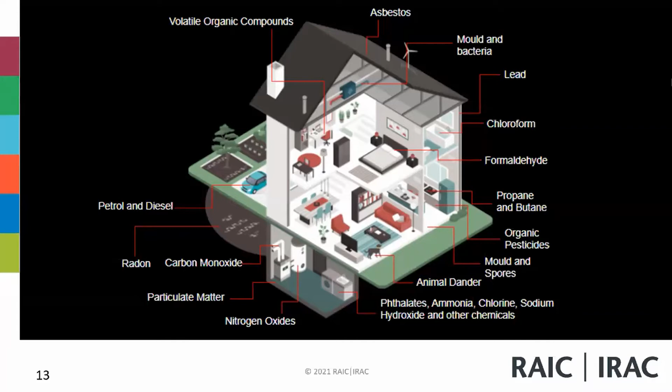Now, I've got 4 kids, so when I say this, I don't say it lightly. Often, the most toxic, most polluted room in the house is our children's bedrooms. We have all this stuff in there, and the air quality in those spaces is the worst. So this is something we really need to think of. This is beyond just the design side, but taking into consideration how we select what we bring into our homes.

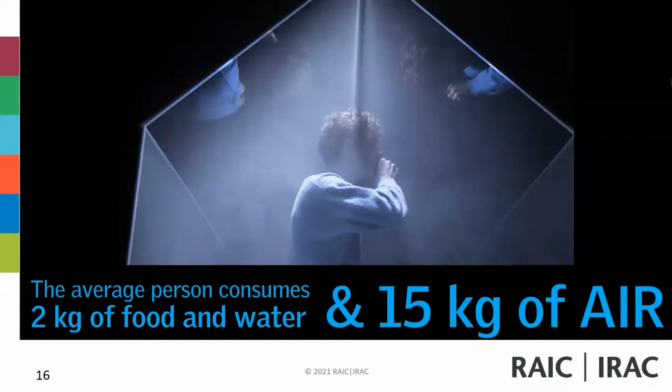The average person consumes about 2 kilograms of food and water. I drink a lot of water and I'm close to 100 kilos, so I'm probably a little higher than that. But for comparison, we breathe about 15 kilograms of air. That's a lot of air. We breathe in 11 or 12,000 times a day. So this is a lot of air we're bringing into our bodies, and our bodies are picking up on any of that pollution that's in the air. The air quality inside can be bad, and we're breathing a lot of air.

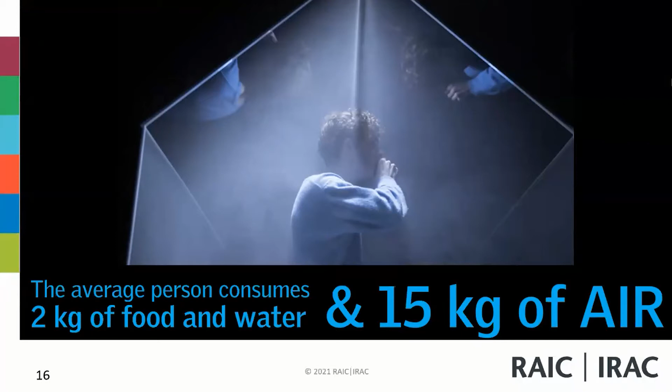And guess what? We're spending 90% of our time inside buildings. This is a big deal. In the last year, most of us, or many of us working from home, have probably spent more than 90% of the time inside. So that potentially polluted air is what we're breathing most of the time, and it can have some impacts on us.

So how does this affect people? The short-term effects of poor indoor air quality include dizziness, fatigue, confusion, headaches, nausea, irritation of eyes, nose, and throat. I focus on short-term because to me, wellness is short-term. Wellness is how do I feel today, or in the near future, where health is how am I going to feel years from now.

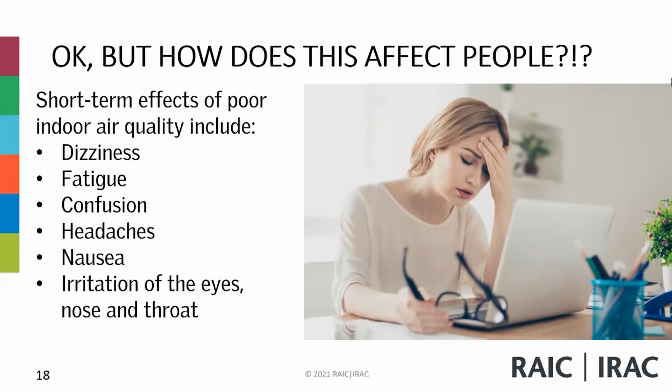And on the health side, indoor air quality can affect asthma, allergies, and other ailments. But really for wellness, this is what we're focusing on: how is it going to affect us now? It can also impact our focus, our problem-solving ability, our productivity. It can make you less strategic, less creative, and more risk averse if you have bad indoor air quality.

And this is a big deal. Think about the boardrooms where companies are deciding the future of their companies and whether they should take big risks or not. Next time they make a big decision, they should consider what's the air quality in here. Are we being too conservative?

Classrooms—there are a lot of studies that show indoor air quality has a big influence on how well kids learn. I have 4 kids, so this is an important thing for me. When you're designing schools, indoor air quality has to be an important element of what you're doing.

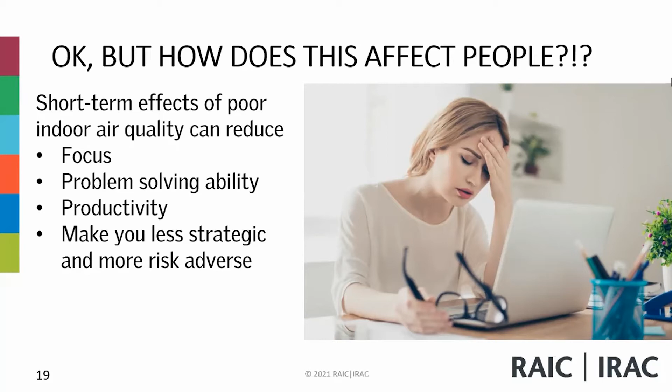So should we be airing out these spaces? No, that's not a picture of me, but I am the one in the meeting typically that does the long blink, or nods my head, or drops my pencil.

I traveled around for about a year with a portable CO2 meter, and I took it to the hotel rooms with me. I took it to all my meetings in architect offices around the country. I started to correlate how much influence CO2 in particular, but air quality overall, has on me. I run the risk of being that guy that fell asleep in the meeting, so this becomes important to me because that's embarrassing.

And if we're in a situation where we can say, hey, let's open up a window or let's open the doors and air the room out a little bit, that's beneficial for me. So we now have, in my own office and in my boardroom, CO2 meters installed.

I also put CO2 meters in all the bedrooms, office, and ground floor of my house, so I can keep an eye on this because it does have an impact. I'll say after measuring it in hotel rooms where sometimes the ventilation isn't so good, it impacts my sleep. Maybe I fall asleep faster, but I definitely don't get as good a night's sleep when the air quality is poor.

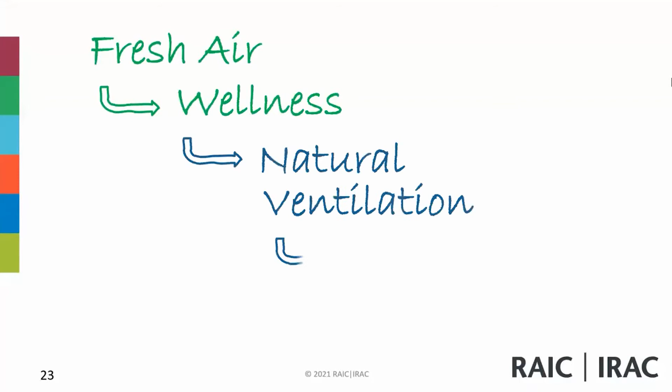So when we started off, I used this as a bit of an agenda and an overview of the presentation. I've now covered off fresh air and wellness, and I'm now ready to move into natural ventilation. So let's go forward - I jumped ahead of myself a little bit.

So, 3 steps to good indoor quality. First, minimize indoor emissions - this is all the materials. Some years ago when we were all learning about LEED, we were learning about low VOC paints and the glues that were used. I remember lots of people saying it's not the smell of new, it's the smell of glue, and that's an indication of the VOCs. So looking at the materials we're putting into projects is a great way to reduce emissions. Second, keeping it dry - making sure you're venting your cooking and your showers and making sure your basement's dry. If it's residential, of course; in commercial there are other sources of moisture you have to think of.

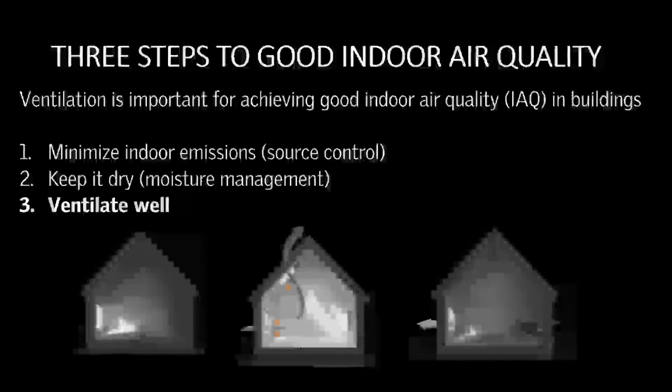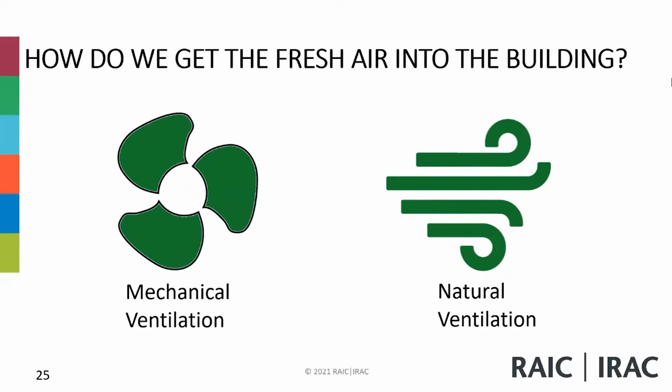But the next topic is you have to ventilate well, because if you've got bad indoor air, the best way to deal with that is to bring in fresh outdoor air. And how do we get fresh air into the building? Well, there are 2 main types of ventilation: mechanical ventilation and natural ventilation. Mechanical ventilation uses fans to pull outdoor fresh air into buildings, and it can distribute it through ducts, or just locally at the fan. It can actually be exhausting air from the building while fresh air is coming in from somewhere else, but really it's using mechanical means - fans - to move that air.

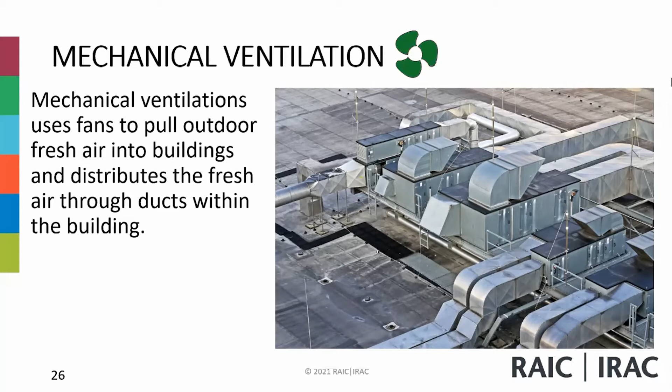Now this has some pluses, because you can increase the size of a fan and add filtration to clean the air as it's coming in. You can add heat recovery ventilation, so you can precondition the air coming in - if it's wintertime and you're exhausting hot air, you could preheat the cold ventilation air coming in. So that's really beneficial, and it's predictable. This is why we gravitate towards it - a fan doesn't care about the outside temperature, it's still going to run at the same ventilation rate. So that's something important.

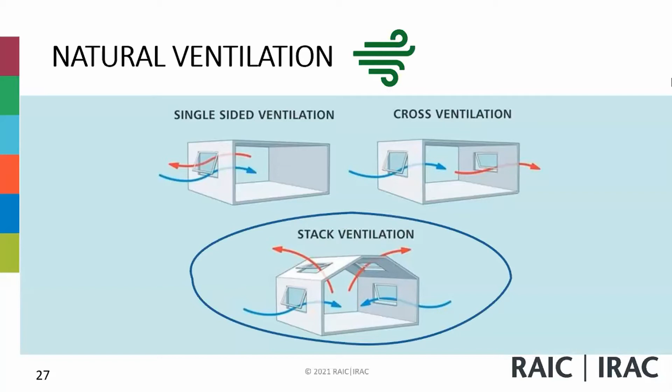Now, the one I want to talk a little bit more about is natural ventilation. You can just open a single window and create some natural ventilation, which is really the exchange of indoor and outdoor air. The one I want to spend the most time on is stack ventilation, and this is taking advantage of the buoyancy of air and the differences between the air inside and the air outside. I'll get into a little bit more of that in a moment.

So with natural ventilation, we have this stack effect. This is where skylights really do well, because you've got cold, cooler, dry air coming in and that warm, moist air exhausting out the top. And the height does make a difference - I'll come back to that in a moment. The other type of natural ventilation is wind, or cross ventilation, as we called it in the previous slide.

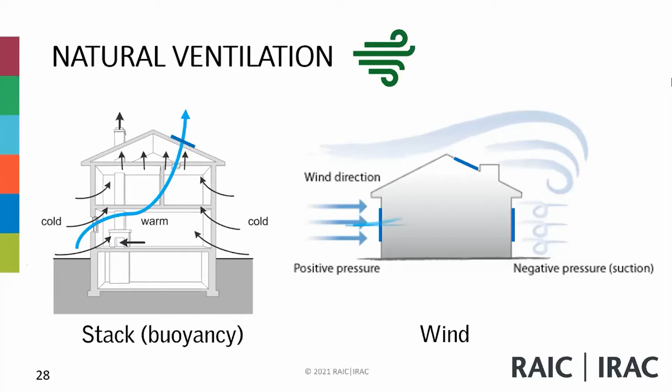This is creating a pressure by blowing against the building. The side being hit by the wind has a positive pressure, while the other side is negative, creating air movement in the same direction as the wind. This works on larger buildings—this looks like it could be an institutional building—so you get a similar effect of wind benefiting natural ventilation.

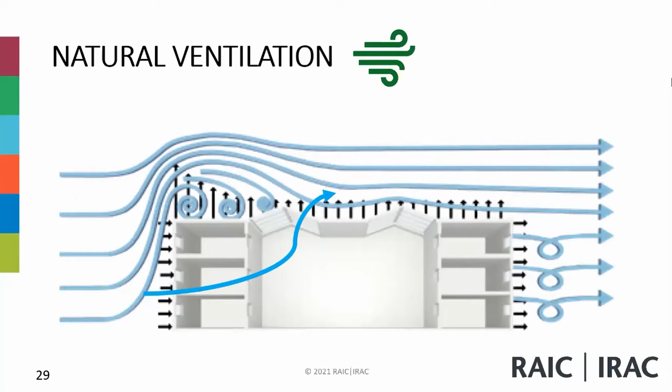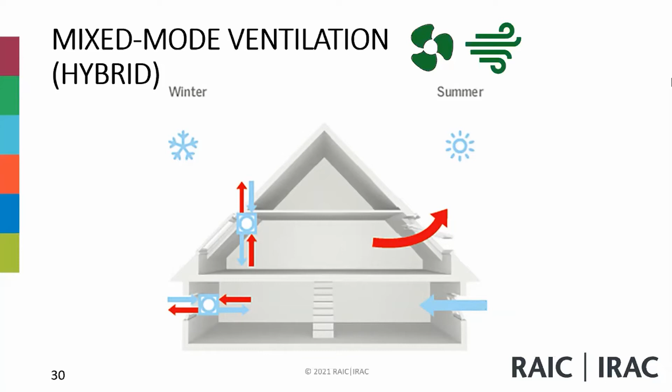Then there's the mixed mode, the hybrid ventilation. I think this is the model that becomes more interesting for North America, or at least for Canada, where we have hot, humid summers if you're in Ontario, dry conditions in other places, but also cold winters to consider, and you might not want to open your windows in the wintertime. So this model is worth exploring further, but we don't have time today, so we'll just focus on natural ventilation.

Now, to give you a deeper understanding about designing for ventilation, I've picked out three standards just to touch briefly on their approach so we can get a glimpse of understanding.

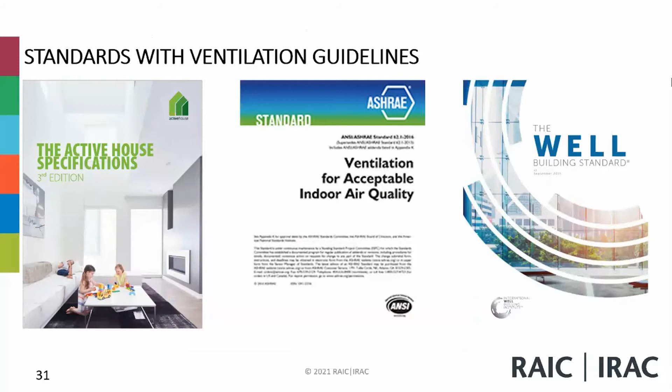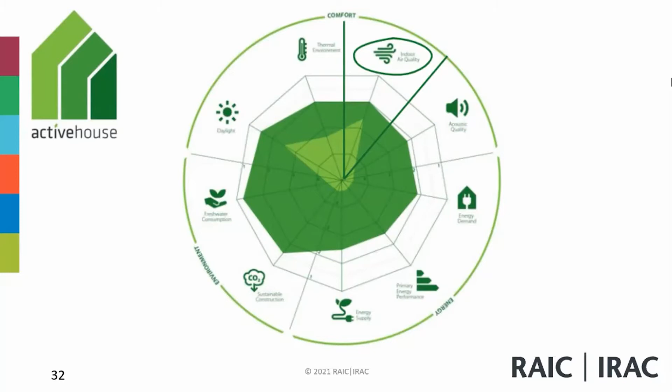So the first one is Active House. This is one I've been personally involved with. Active House came out of Europe, but it's gone around the world, and we have a couple of projects in Canada and a couple more in the pipeline. I like it particularly because of the comfort side. Of the 9 metrics, there are 4 in comfort in the latest version, and indoor air quality, circled at the top there, is one of the main design metrics you're working with in this standard.

Now, this standard's design targets are using CO2—carbon dioxide, the main pollution coming out of people—as the indicator for indoor air quality. That's debatable whether it's a good proxy, to use the industry language. But if you're in a space where most of the pollution is coming from people, then CO2 is a good proxy. Yes, it does ignore formaldehyde and other things, but if their concentration is low, that's not so important. So it's good to understand that caveat.

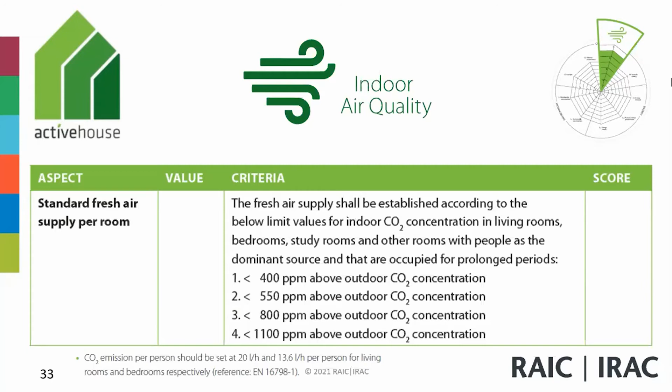They are using parts per million, which is a concentration level. To give you a reference point, typically outside is about 400 parts per million—that's what your outdoor fresh air sits at. This chart is giving you an amount above the outdoor level, so that 400 parts per million would actually show as 800 if the outdoor concentration was 400. And for one more reference, typically we say 1,000 to 1,200, depending on the article you're reading, is considered an upper threshold of good indoor air quality when measuring CO2.

So how do we model for that, or design with that? One option is a software from Velux that can model energy and indoor climate. You can build your model in there and figure out how much ventilation you need, and how much the open windows will provide for you.

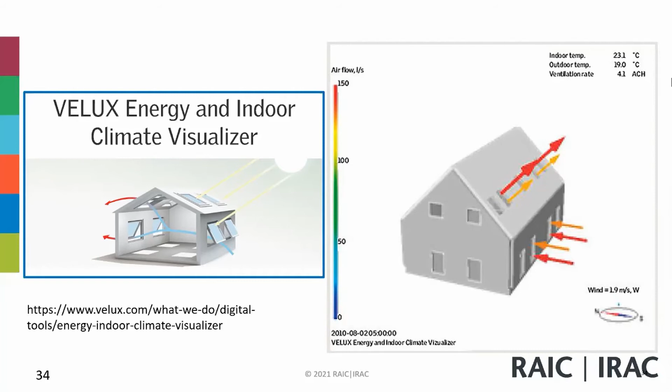Then we have ASHRAE, the American Society of Heating, Refrigeration, and Air Conditioning. This is what's called out in the building code—62.1 is the main one. 62.2 actually isn't called out in the national building code, but 62.1 is. I wanted to highlight this one line from the intent of the document: to specify minimum ventilation rates and other measures intended to provide indoor air quality that is acceptable to human occupants and that minimizes adverse health effects.

It's like a lot of things in the building code—it's the legal worst you can get away with. It doesn't say anything about optimizing comfort or well-being; it just wants to minimize adverse health effects. That's important because this becomes our benchmark of what is allowable by code, and that means there's an opportunity. This is your baseline, meaning there's an opportunity to have improved ventilation beyond that.

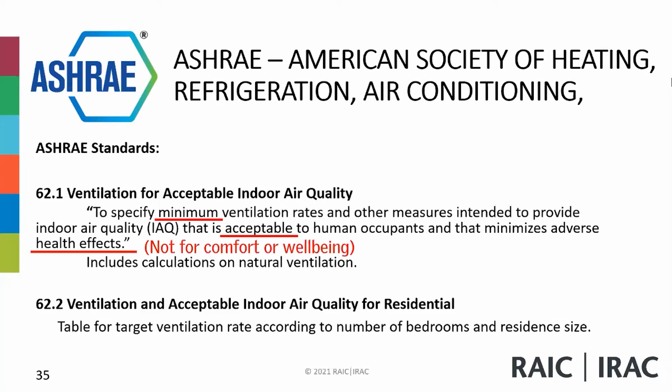Then there's the WELL standard, and I really like how they've approached it. They said, you know, ASHRAE is well known and respected, people are used to it, let's use that. But for larger buildings over 500 square feet, you need to use what's called demand-controlled ventilation, and in this case, they're using CO2.

Anytime the CO2 levels get higher, the more people or longer they're in a space, as they increase, once they hit that threshold of 800, you either have to turn the fan up to a higher speed or windows are going to open. And I'm like, that's brilliant. What a great way to have combination ventilation.

They have some additional considerations for outdoor air quality as well. But I have a number of friends that are contributors to the WELL standard, so it's a very respectable document.

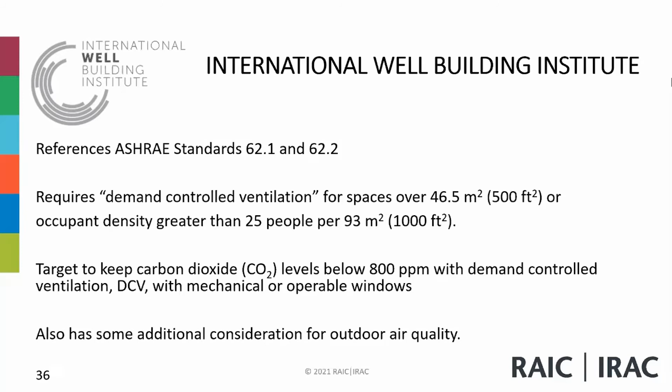So I mentioned CO2 and ventilation rates, and to be clear, ASHRAE is a bunch of equations, and you understand how you got to set your ventilation rates by room, for large buildings. And then for Part 9 buildings, for low-rise residential, you're really looking at an air supply number based on the type of room: master bedroom, bedroom, living room, that sort of thing.

So how do these equate? I mentioned earlier that CO2 can be considered the dominant pollution when people are the dominant emitters of pollution in the space. So it's an awful graph, I apologize I didn't take the time to make it a crisper one, but you can see that about 15 CFM or 7.5 liters per second is going to get you about 1,000 parts per million.

So that becomes that threshold for air quality. So anything better than that, any higher ventilation rate than that, should give you a lower CO2. Now I found this other chart off engineering sites, and I'm an engineer, a professional engineer, but I hang around more with architects, and I'm really into the health side. So I often disagree with these engineering things, and I'll tell you why in a moment. But this chart gives you like an undervented, ideal, and overvented.

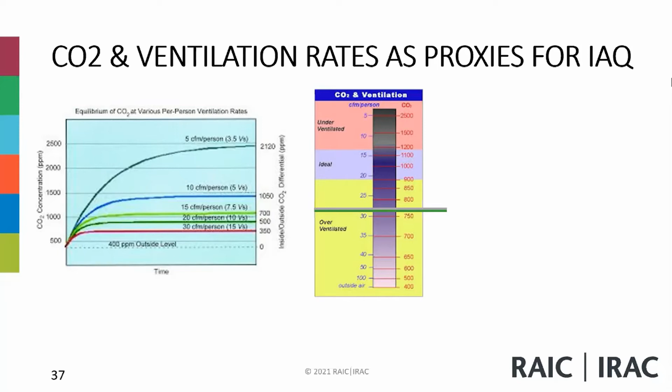Now, to give you an idea, the line moved a little bit. The threshold for WELL and for Active House is 800. So you can see what they're saying in this image is that that's overventilated. Well, how could it be overventilated? Well, when it comes to the engineering side of things, and so much of what the building code now is...

With our race for energy, full acknowledgement, energy is great. It's closely affiliated with reducing CO2, and we need to do that for the environment, but not at the cost of our health. And this becomes really interesting because it costs money to have more fresh air in a building. You have to condition that air, heat it or cool it or dehumidify it.

So on the engineering side, minimizing the ventilation means lower mechanical costs or lower building operation costs. But we know that building operation costs are tiny in comparison to your people costs. So productivity—it's very easy to make the case that more fresh air increases productivity. It's a good return on investment.

Okay, final note on this one. CO2 is easier to measure than ventilation rates. So if you're doing measurement in the space during the ventilation, CO2 becomes a good proxy. The ventilation rates are easier to design for. So that's something to keep in mind.

ASHRAE is all upfront ventilation, where both WELL and Active House are looking more at the use of the space. If you're in the space, what happens if you have a party? What happens if in your boardroom you've got extra guests in there and the ventilation isn't designed for that capacity? That's why I like the WELL one—if you have more people than you exceed the capacity for the ventilation, you have a backup plan, you can shift up to that other gear.

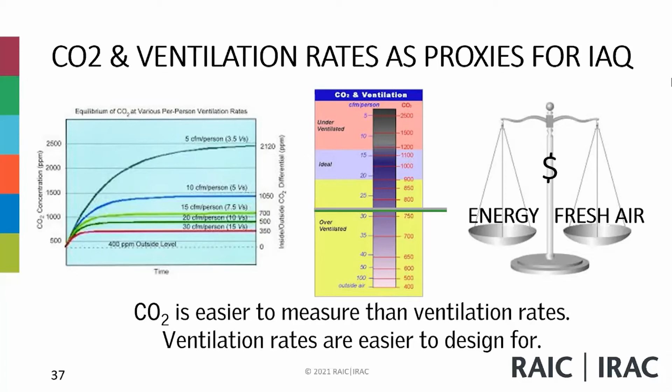Okay, so now I'd like to take a few minutes to go through some of the—I guess it sounds too big to call them design principles—but I'm going to try to explain some of the simplistic stuff you'd be able to extract from reading through all the ASHRAE material. So this is a simple building, an elevation cross section, and it'll become more apparent when I flip the slide.

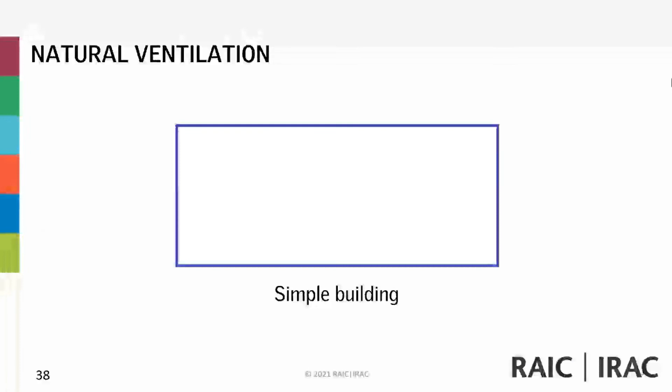So let's take that one more step. Oh, I jumped the gun on that one.

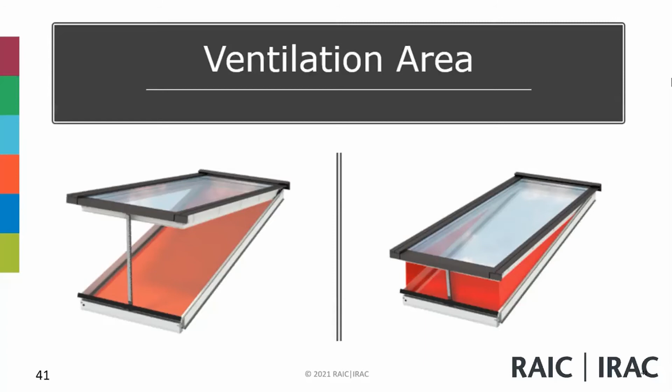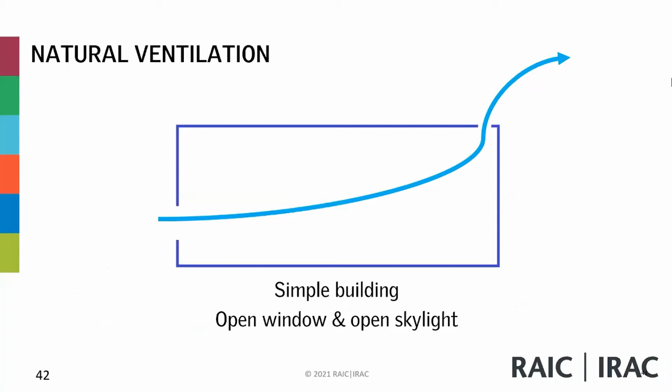So what I was jumping ahead from was that as you make your window higher, you can reduce the opening size and get a comparable ventilation rate through there. So that makes the case that skylights are good for natural ventilation.

Now I alluded to the temperature, the humidity, the barometric pressure. Natural ventilation is optimized when the outdoor temperature is lower than the indoor, when the outdoor humidity is lower than the indoor, and when the outdoor barometric pressure is higher than the indoor. This is a case where it's a pressure difference that's driving this buoyancy or stack effect. Hot air rises because hot air is less dense. So lower humidity, lower barometric pressure, all these things contribute to less dense air, and it wants to push up naturally, hence the name natural ventilation.

Now that arrow can go in reverse, and I've experienced this in my own house. I have 8 skylights, 5 of which open, and if it is a hot Southern Ontario humid day in the summer, you can feel that warm humid air coming in the top of the skylight and pushing down out the bottom of the house.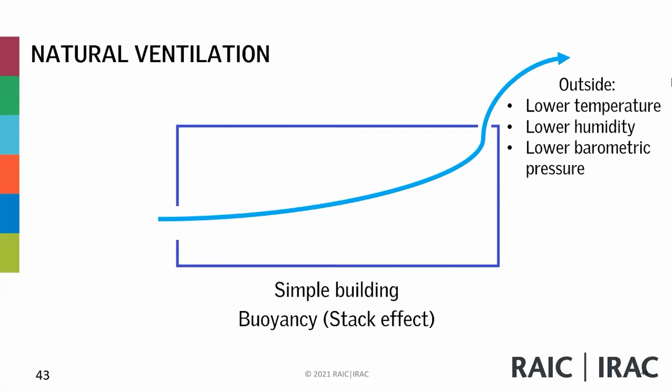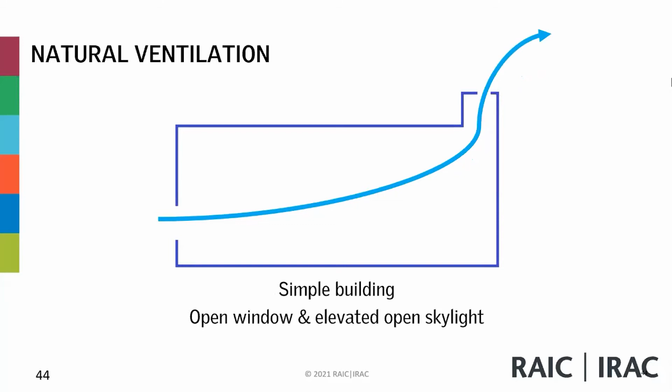Now you can further optimize this by creating a stack. You could actually elevate the skylight to get a little bit more natural ventilation, or a little bit more flow rate through that.

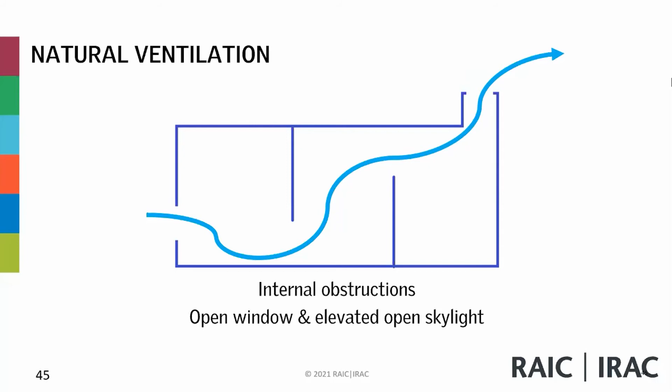However, if you have internal obstructions, it's going to reduce the flow through your building, and you're going to have to increase your openings again. So again, ASHRAE and the European equivalent that Active House uses does talk about the friction of the air going through. As you constrict the air, it's going to slow down as it goes through, so you're going to need a larger opening to obtain the same ventilation rate.

Now, similarly, if you introduce insect screens, it's going to reduce the amount of ventilation rate.

Now, my favorite story on this, some years ago I saw a presentation on the Manitoba Hydro building. The presenter, most of the presentation, wasn't great - us engineers were not always the best presenters. Then he started talking about mosquitoes and natural ventilation. I'm like, what's he getting at? So on that building, they actually estimated how high do mosquitoes fly in Winnipeg, and at that point, anything above that point, we don't need insect screens to keep the mosquitoes out. So we can optimize our natural ventilation by eliminating the insect screens. I thought, wow, that is so neat. And that was some years ago, and it's one of those things that's always stuck in my mind when I think about insect screens.

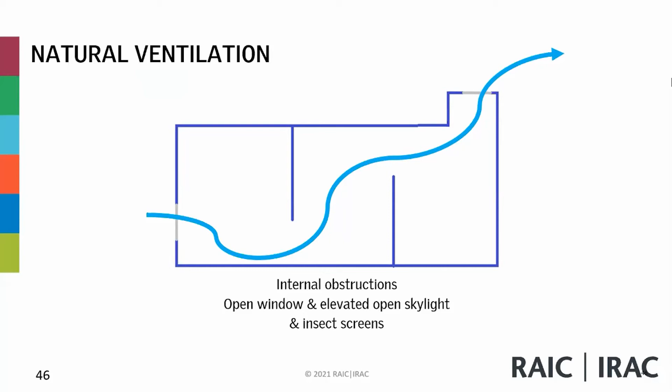So one number that I've read a couple of times is that insect screens reduce the airflow by about 50%. That's pretty substantial - imagine that you have to have an opening twice the size to accommodate an insect screen.

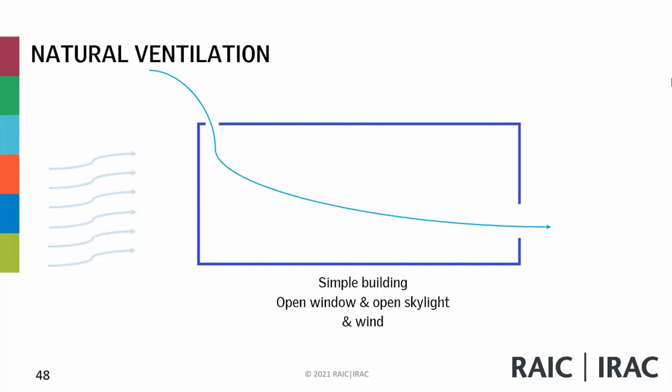If your design is going the other way, though, it could hinder your ventilation. You might have the buoyancy working against the wind, so you're going to have a reduced ventilation as a result. So if you're designing for natural ventilation, it's really important to understand the prevailing wind on your building site, which in some cases is complicated when you're building where there's a lot of obstructions or other buildings or forests or mountains around. It could take some wind studies to understand this part of it.

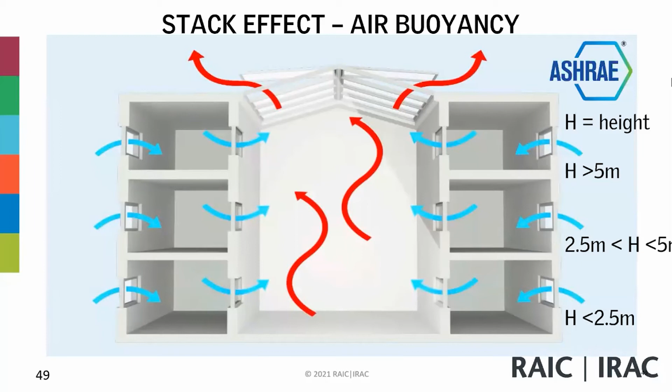So I mentioned the height. ASHRAE does have some understanding that at different heights you have a different multiplier. A lot of these equations are based on multipliers when you're working through this, so they understand that, and the more height you have, it's going to improve the ventilation rate of your design.

And what about old buildings? This building is 750 meters from my house. It's my children's school, the second oldest school in Ontario. Interestingly, and I haven't mentioned the pandemic much in this talk, they've kept their windows open all winter, except for some weeks they weren't in school.

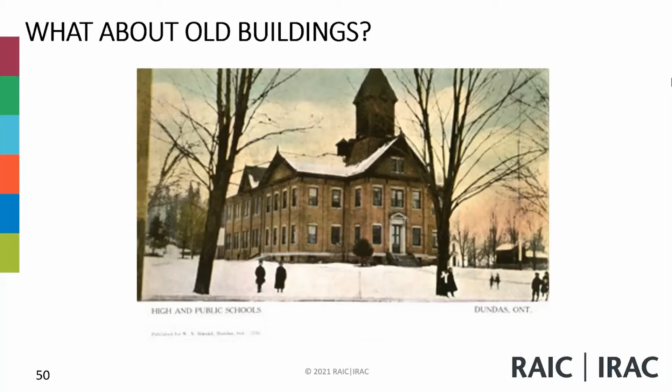Old windows or old buildings like this often don't have mechanical ventilation. My own house only has exhaust fans, and we don't have an intake system. It's interesting to see. This is like Europe, where they have a lot of hydronic heating and not necessarily ventilation. Opening windows might become one of your best options.

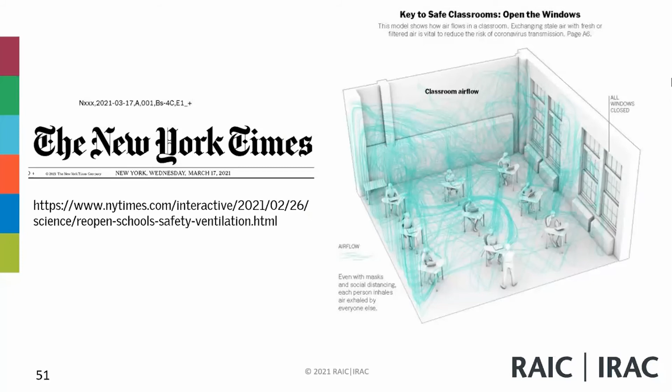So this is one of the tricky things: how can we actually tell if we need more fresh air? As you enter a space or a room, you may detect smell, temperature, humidity, or another indicator of poor air quality. But that's because you're changing from one space to another - you've got a comparison. It's much harder to notice poor air quality if you're in the room for a period of time and that air quality is slowly changing.

This is where the importance of having an indoor air quality sensor really comes in, because you've been sitting there and maybe getting a little tired, less focused, feeling a bit bored, but you don't really know what the air quality is because your body is not a very good sensor. Dr. Kessick did a great paper a few years back where he talked about how humans are bad sensors. It's true, especially with air quality.

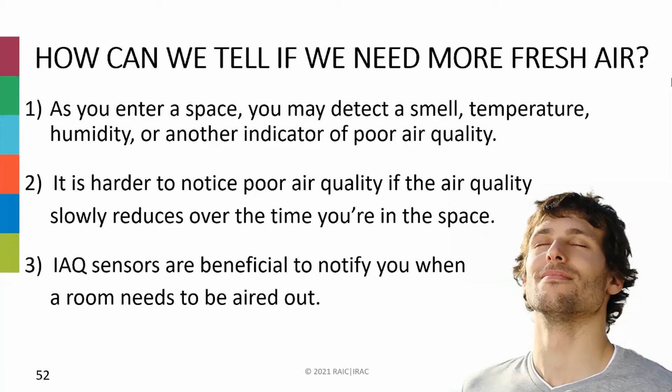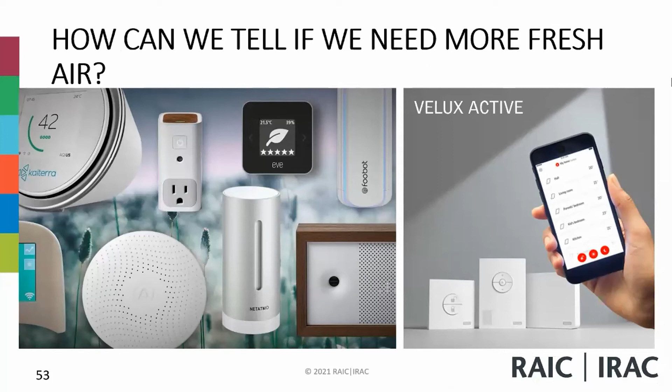So having something - these consumer products can be as low as $100 now - that could beep or something to tell you it's time to air out your room. There are lots of different products on the market. I can say I've actually got 3 of these that are on the screen right now. Obviously I've got the Velux one, but I've got 2 of the other ones as well, and they're great for telling you when you need to increase your ventilation.

Now this one's really neat because this was one that we collaborated on in Europe. I actually have one on order, haven't got it yet. But this Airbird tweets and changes its colors shining on the wall when there's poor air quality. Beautiful design, designed with a division from 3XN, the GXN group, as well as Leapcraft, who I've known for some years - they're experts in sensors in Denmark.

What's interesting is that they're doing a pilot project right now in a number of Danish schools. One of my colleagues, a postdoc, is researching how people are actually using this in the classroom, and whether it's benefiting the class. I mentioned mine's on order - perhaps I'll loan it to one of my kids' classrooms when it comes in.

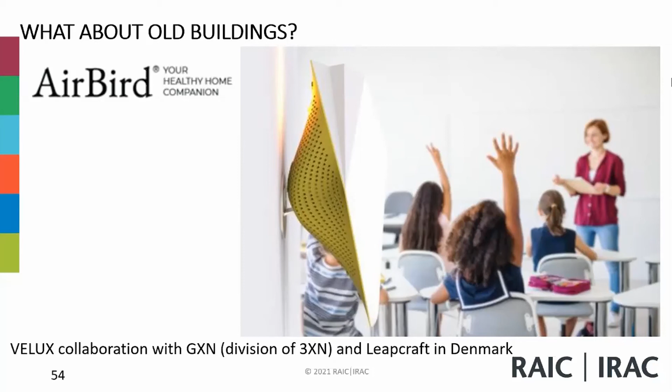I've mentioned airing a couple of times, so just in case it's not clear: an airing is a short period of high ventilation rate due to one or more open windows. Ventilation rates achieved from airings are typically in the range of 1.5 to 5 air exchanges per hour, so it can be a very effective way to bring fresh air into a space. I'll show a slide before the end of the presentation demonstrating an airing with a running CO2 level in the space. But what I've observed is that when you do a short airing, the temperature and humidity change much slower.

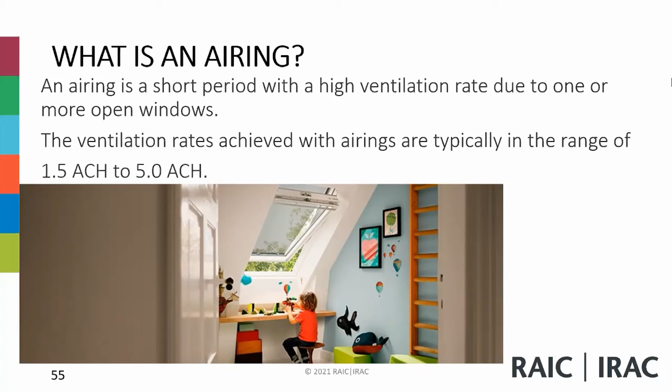There's more latency, to use an engineering term, in how temperature and humidity change, where CO2 concentrations change quite quickly. So a very short airing would have minimal impact on temperature and humidity, but quite a big impact on CO2. And that's why this works so well.

All right, so moving on, we've gotten through fresh air, we've gotten through wellness, we've now covered natural ventilation, and bringing the presentation full circle, we're going to talk a little bit about skylights, because that's what I spend all day, every day working on.

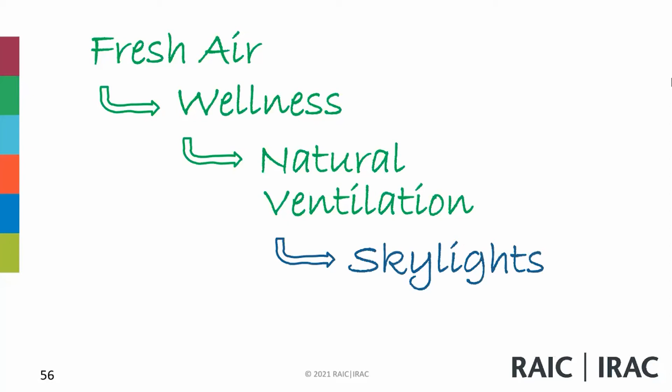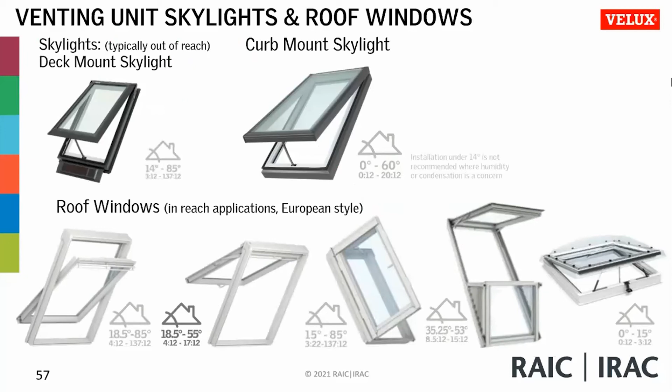So let's start with the residential side. We have a number of different types of operable or venting unit skylights. These are individual openings. Some of them can be grouped together to try to make something similar to a bigger window, but really they're smaller unit skylights. These products have different installation approaches, and different ones are popular in different places around the world.

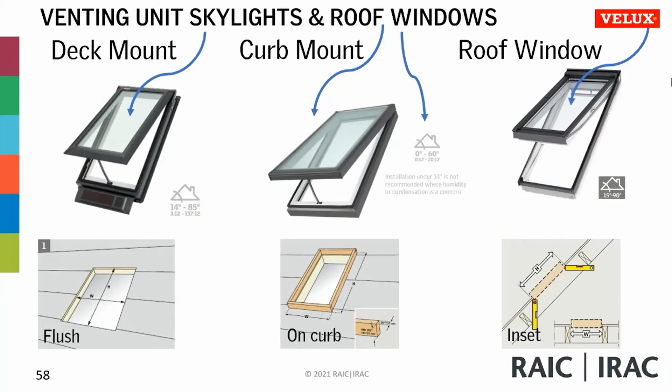The deck mount is more popular in the central to eastern part of Canada, where the curb mount is probably more popular in the western part. And the roof window, which really is European for skylight, is what's the dominant product in our European markets. But we have all three available. All three will do roughly the same thing. You can size them to get your opening size, and that's what's important for natural ventilation.

Now, roof windows, skylights, you can see the kitchen image here, are typically out of reach. We don't live in our attics as much as the Europeans, although I'm in my attic right now, presenting actually from my bedroom.

But they're typically out of reach, where your roof windows—I like to joke that post World War II, we moved into our basements in North America, and the Europeans moved up into their attics and installed Velux windows. So in Europe, the Velux windows are more like a window because they're within reach. They're just a sloped window. So that's why they're called roof windows there, as opposed to skylights that are up above.

But I can say that because a lot of our European products are very innovative, and we can get better energy efficiency values with many of them. We're starting to see a larger demand for out-of-reach roof windows. So even if people are not going to be opening it up very often, they want that higher efficiency that comes with that window. So we've got some really good options there.

Now, I mentioned this one earlier, the Velux Active system. This is only available on the skylights today. We're a couple years away from having it available on the roof windows, but this system comes with a sensor that can measure temperature, humidity, CO2, and sound. It'll actually open the skylights automatically if you want it to, if the temperature, humidity, or CO2 get too high. So mine's set up to do that at home, and I can get it to operate.

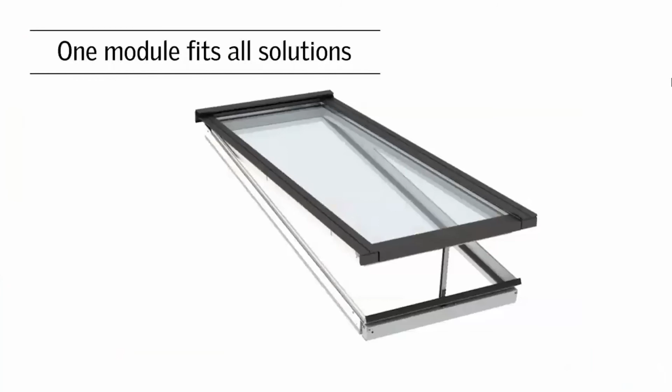Now this active system is going to be available in the next skylight I'll talk about, hopefully later this year. We're just finalizing some UL certifications on that. But the next product I want to talk about is the one that I spend most of my time on now, and my team supports it. This product is the Velux modular skylight.

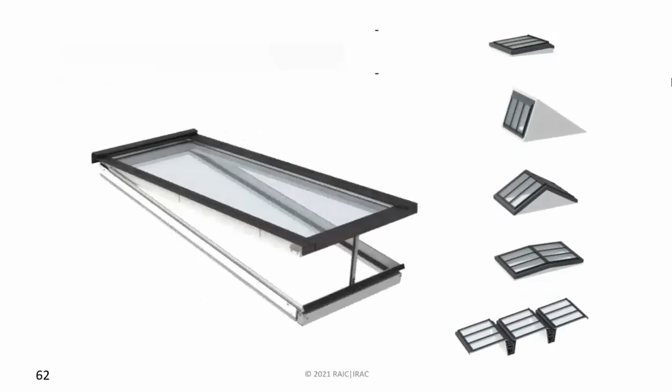This skylight is a pultruded fiberglass frame. It was designed with Foster and Partners more than a decade ago now, and it's available in all these different configurations. I'll show you an image in a moment that really captures all the ones we offer and support in Canada. But this is a product that, with the U-value and the modularity, is really coming in heavy for institutional, academic, commercial spaces, and high-end residential.

You can see these things have no framing in between the windows, so they come very close together, as opposed to our unit skylights where you have to have the wood framing, or the steel framing if it's a non-residential application. So these are all the different configurations, and you can see each of these images—all but a couple, I think—are showing openable venting skylights, so they can be used for natural ventilation.

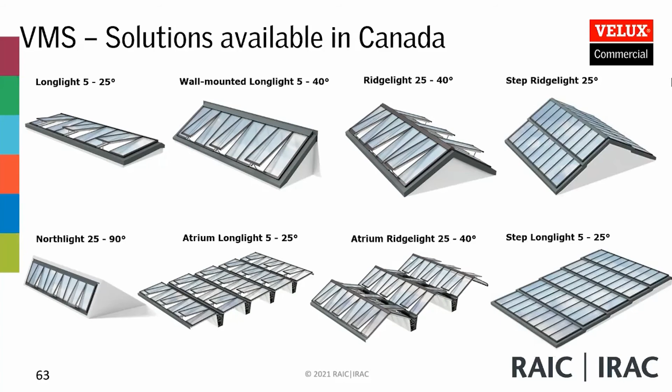Now, as we come closer to the end of the presentation, here's a case study: the UK Hydrographic Office. This has 200 skylights in the atrium, which runs along the center spine of this building. You can see where the red arrow is - that is the spine of the building, and there are 200 skylights there.

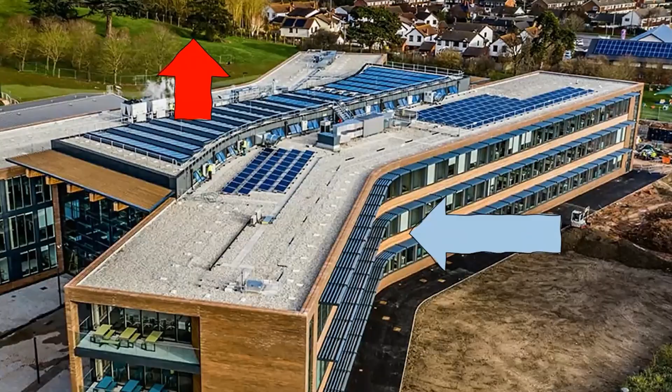That design was optimized for daylight and connection to the outdoors, but the natural ventilation was a bonus. So all these offices on the two adjacent wings benefit from having these operable skylights - you can have the air exhausting out of the atrium and fresh air coming into the offices.

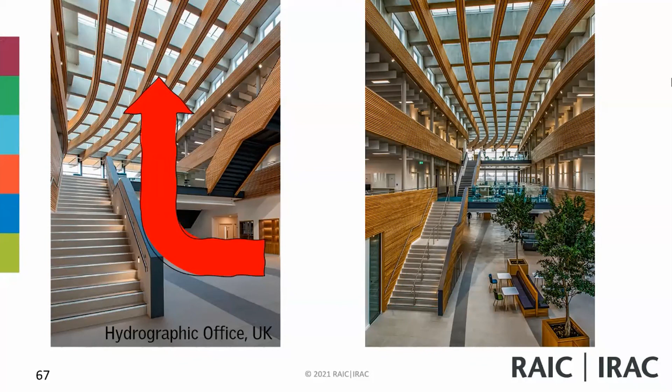I didn't mention this earlier, but it's important to think about where you're exhausting that air. We do a lot of skylight bedrooms, so depending on which province you're in, for residential you have the opportunity to have a bedroom whose only window is a skylight - particularly in Ontario, where you don't have to have egress in every bedroom. You can have a venting skylight, but you want to make sure that's not your only exit point, because you don't want the pollution from the kitchen exiting through the bedroom. Again, we want to protect the quality of the air in our bedrooms.

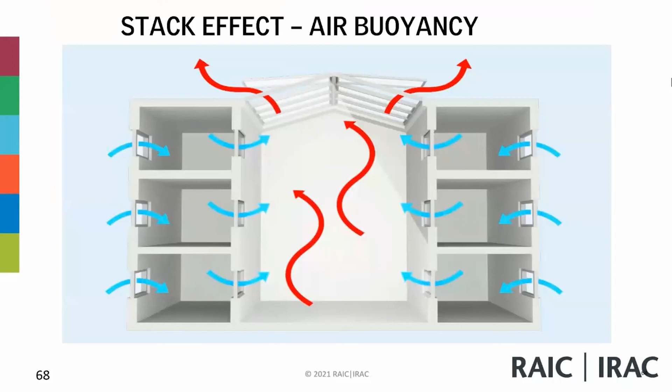So that project is very similar to this image that I showed earlier - we've got cool air coming in through the windows and the hot, stale air exhausting out of the top.

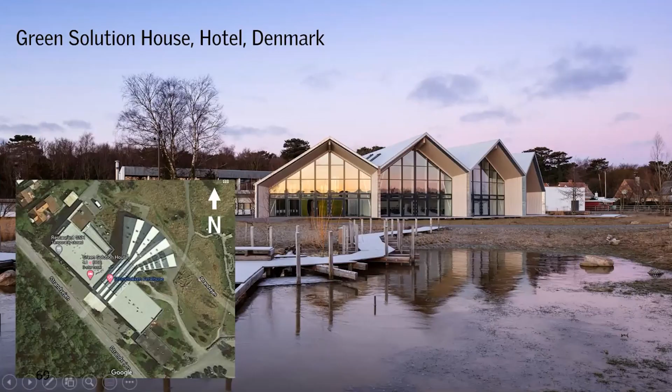The very bottom one - I'll use my cursor here - when we're looking at the satellite view, you can see there are some more windows in there. I'll show you that one in a moment. And then you've got some small skylights over here. This is the lobby, or going into that space. You can see some of the Velux modular skylights, and some even have photovoltaic cells on them - that's an option for larger projects.

So this space is naturally vented. But this space here doesn't need a lot of daylight because it's got these large north-facing windows. I'm sure Monica's going to talk about north light and positioning of skylights in her presentation, so I won't get into that. But all we've done here is include some small punched-out unit skylights, or roof windows in this case because we're in Europe, that allow fresh air through. They're also used for daylight to balance the light with the large windows, but they're used for natural ventilation. This is also set up so that at certain CO2 levels, they will open.

So when the room was full, a couple hundred people in this room, at some point in the morning I remember the skylights starting to open - you could hear the little whir of the motor as they opened up. Because we were all interested in this, somebody took a reading and said, oh yeah, the CO2 level is high enough that we need to air out the space. So it was nice that happened automatically, before anybody started nodding off, dropping their pencil, giving long blinks.

Okay, so we're coming to the end. This is the last project that I'm going to talk about, and it's one that I know very well. This project is in Etobicoke, which is part of Toronto. It was designed by an architect firm called Superkül, and they deserve that name, and it was built by a builder called Great Gulf. Great Gulf has been a very big supporter of the Active House program and an early adopter for Canada.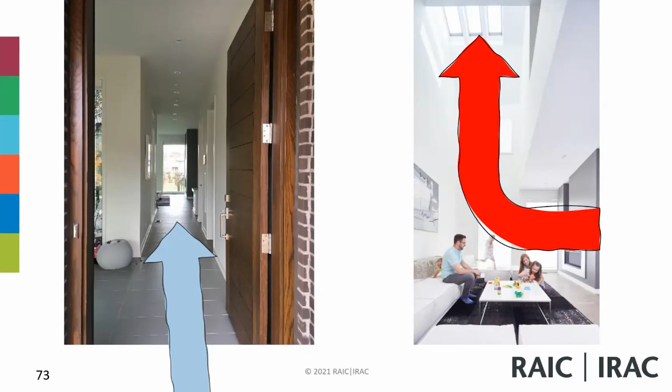It was really interesting—this works in residential as well as institutional settings. If you take a closer look, the most recent edition of the Active House specification has a very similar picture to what I'm showing. Those are actually my kids on the cover of that.

We did a bunch of monitoring, and I really geeked out on this while we were in the house. I brought all that stuff home and have been working with it for the last 5 years. At the end of the 6-month period, we played around with the graphs, and we found only 5% of the time were we over 1,000 parts per million.

That was when we went back with the engineers, in part because I was turning off the HRV and playing around with things, seeing if I could do stuff with the skylights at different times of the year. I played around with it a lot, which, as much as engineers like to do that themselves, they don't like it when other engineers do it. But that contributed to some of that performance. For the most part, this is probably twice as good as most new homes.

There are some really good examples of net zero houses in the US where they've monitored CO2. I didn't include a comparison here—I probably should have—but there are comparisons that would show this is a really good performance.

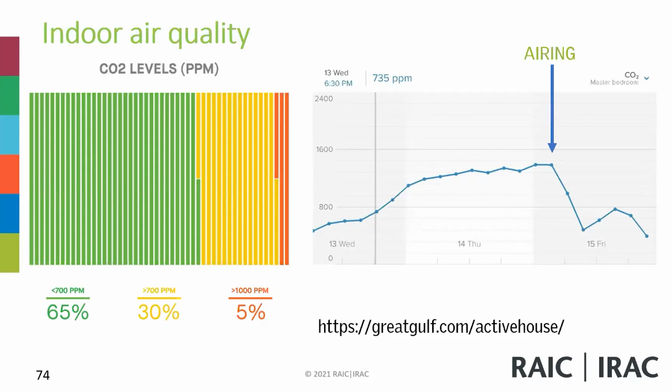This graph on the right is from one of the devices we had monitoring CO2. You can see the CO2 got up as high as almost 1,500, and then I opened the windows. Within a short period of time, the CO2 level dropped down to 600. Then I closed the windows and it climbed back up a little bit. So that's just a nice visual of how fast CO2 can drop, and I could overlay to show that the temperature and humidity barely changed at that time.

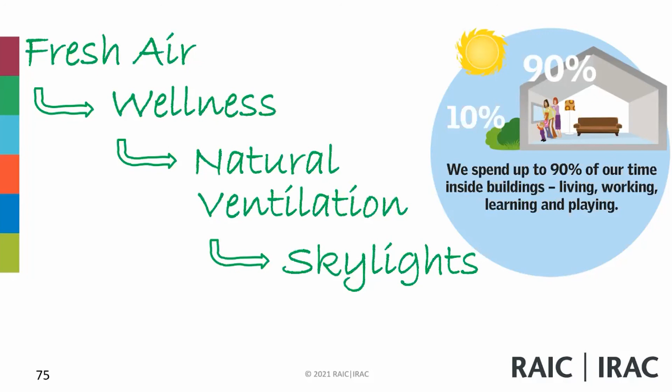We made it, we got through it, and I haven't lost my voice—that's very good. Today we covered fresh air, the importance of fresh air, and connected that idea to wellness: fresh air, particularly inside our buildings, is extremely important to how we feel, how productive we are, even how well we sleep. We've connected that with natural ventilation, the importance and opportunity it has in being part of our ventilation mix to move outdoor fresh air into our buildings. And we've shown that skylights are really good at optimizing that natural ventilation.

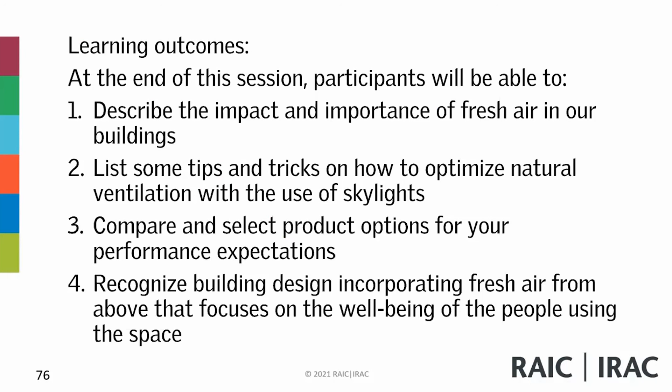The learning outcomes—I mentioned these at the beginning. Hopefully I've covered them. It's always hard because I think we came up with these learning outcomes before I built the presentation, and we didn't go back and adjust them. So I hope they've met your expectations.